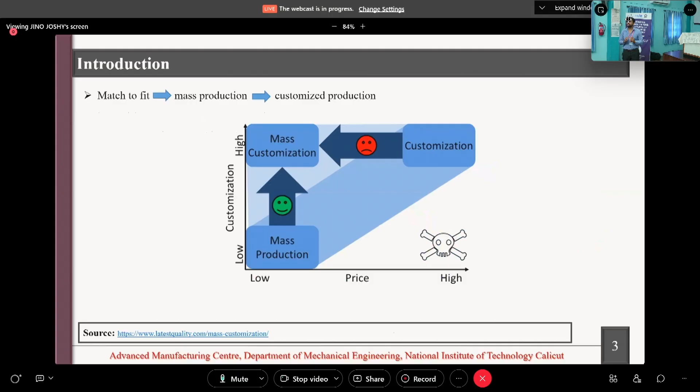Whenever customization is low, mass production cost will be less. And whenever customization is higher, that means if you reduce the number of components you are ordering, the product cost also gets increased. But our intention here is to make highly customized components with very low cost. So that means you need to get freedom for customization, that is what we are all looking forward to.

When we look at additive manufacturing, to some extent it gives us good flexibility. In addition to that, additive manufacturing gives us many advantages. After that, I will tell you what additive manufacturing is.

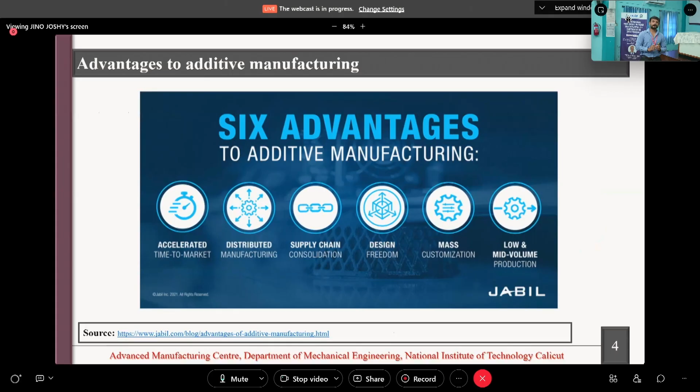Then there is design freedom. Some components are very difficult to fabricate through conventional manufacturing processes, but those designs give a lot of efficiency, for example in the working environment. But we are not able to fabricate that in conventional ways. So in such cases, design engineers need to compromise with manufacturing engineers to change their design to manufacture it, compromising efficiency or functionality.

With the help of additive manufacturing, without compromising, whatever the design engineers are designing, we will be able to develop it. That is what is called design freedom. We will be able to get design freedom, mass customization, and low and mid volume production. This process is not currently possible to apply on a mass production scale; nowadays it is developed efficiently to a level of low and mid volume production, not for high volume production.

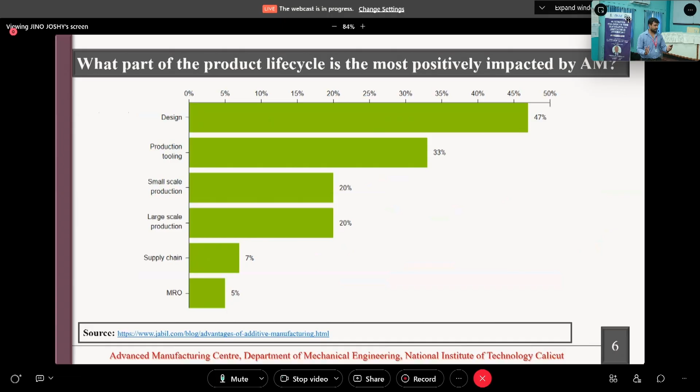If you look at the industries where additive manufacturing has positively impacted, its impact was maximum in the design industry. The way we design for conventional manufacturing has completely changed with the help of additive manufacturing. The next impact is in production and tooling industries, then small scale production, large scale production, and supply chain as well. So it is more related to design. The way we design components for different applications has changed with the adoption of additive manufacturing, that is 3D printing, as a manufacturing process.

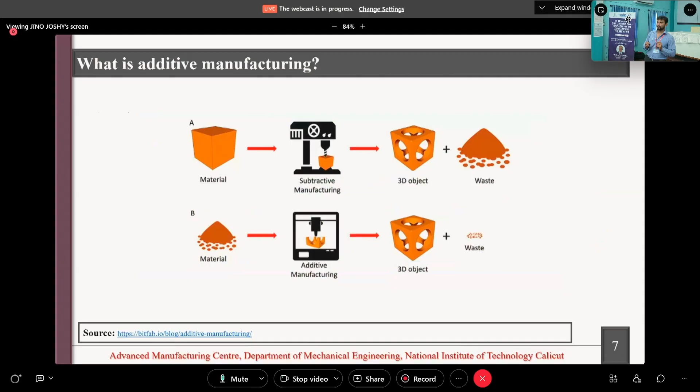But in additive manufacturing, we take the material in the form of powder, wire, or other forms, then apply additive manufacturing processes to directly make the 3D object in a layer by layer fashion. So ultimately you end up with the 3D object, and the waste will be significantly low. From the figure you can see the waste demonstrated in the schematic diagram, very little material. We cannot say there is no wastage, but to some extent there is very little. So we can say it is one of the environment friendly, sustainable manufacturing processes.

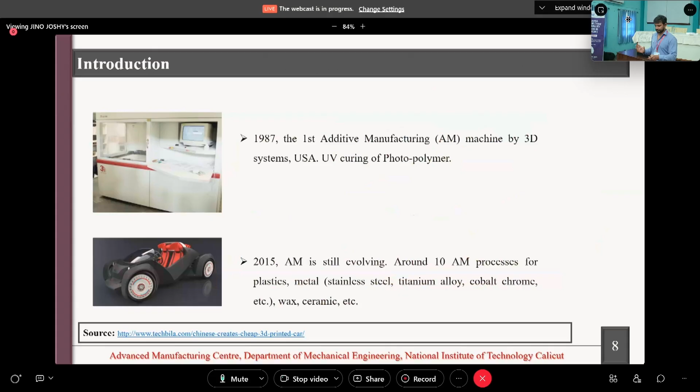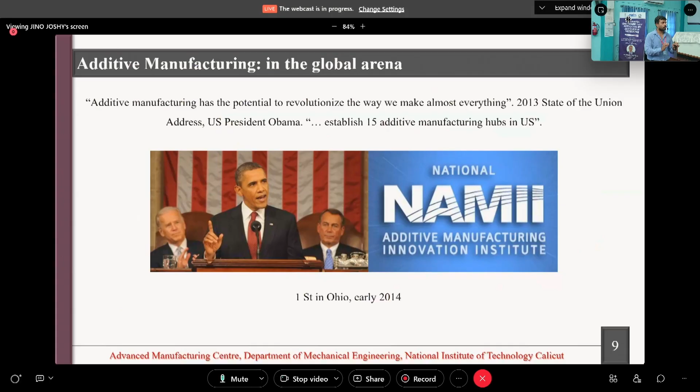Additive manufacturing got global recognition or global attention in the year 2013 when Barack Obama praised additive manufacturing in one of his United States addresses, the State of the Union address. What he mentioned is that additive manufacturing has the potential to revolutionize the way we make everything. With this statement he started his address, and he established 15 additive manufacturing hubs in the US.

Followed by that, a lot of US industries as well as the US Air Force, US Navy, National Science Foundation, and so many other funding agencies started investing, including NASA. They started investing a lot of money in additive manufacturing research. This created a requirement to develop a lot of additive manufacturing capabilities across the world, so many software companies and other well-established companies started investing money in it by understanding its potential.

So it became a rapid evolution of additive manufacturing. Research started in the world because before 2015 we were not knowing about additive manufacturing a lot. It was there, even in NIT Calicut we were having rapid prototyping machines since 2006 onwards, but there was not much research happening. But now that is not the case, we do have a lot of research happening in the area of additive manufacturing.

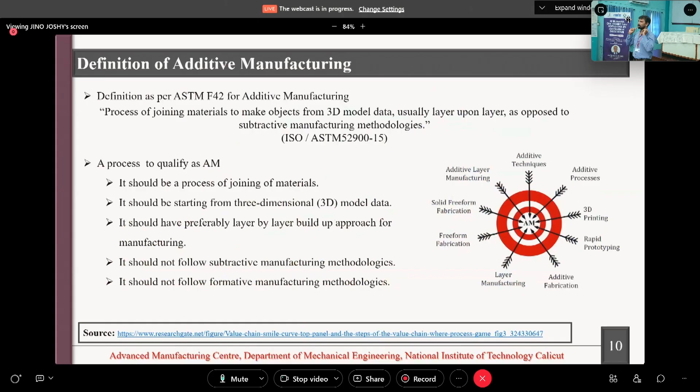So let's come back to the definition which I asked previously. According to the ASTM F42 committee, additive manufacturing is defined as the process of joining materials to make objects from a 3D model data, usually layer upon layer, as opposed to formative or subtractive manufacturing methodologies. Whenever we try to call a process additive manufacturing, it should qualify this definition, otherwise it cannot be called an additive manufacturing process.

Even though there are many processes having the methodology of layer by layer fabrication, in many cases we don't call them additive manufacturing because the process or methodology does not start from a 3D model data. It is compulsory that if you want to call a process additive manufacturing, it has to start with a computer digital model, a CAD model.

So not only this term, this similar technology was known in different parts of the world by different names, as you can see in that figure. Some places it is called layer by layer fabrication, some places 3D fabrication or 3D printing, some places rapid prototyping, some places additive layer manufacturing, some places solid freeform fabrication, some places digital manufacturing. That is one of the reasons why ASTM came up to form a single name on it - that's why they came up with this particular name, additive manufacturing.

I hope you guys understood. So according to this definition, in order to call a process qualified as additive manufacturing, it should be a process of joining material, it should start from a 3D model data, it should preferably have a layer by layer build approach, and it should not follow a subtractive or formative manufacturing methodology.

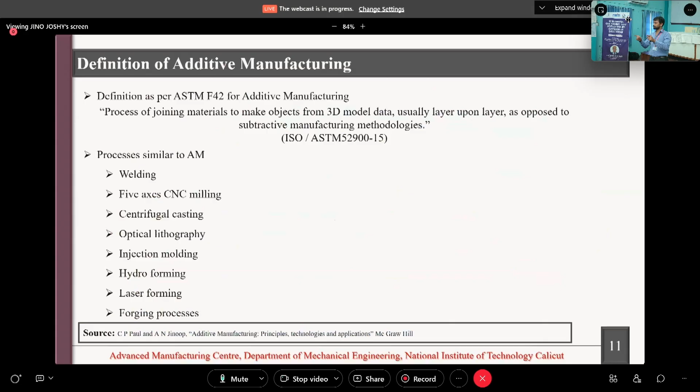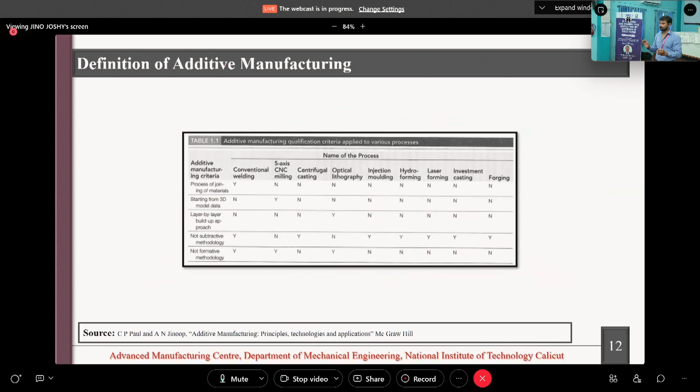Especially in areas like aerospace or biomedical industries, the number of components we are fabricating is very, very less. We are making 3 or 4 rockets in a year, right? So we require only 3 or 4 engines a year, that much component only we require. So the number of quantities we are making is less.

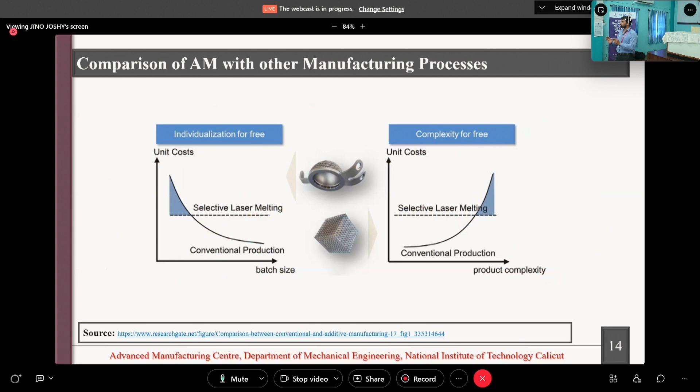But we cannot say that there are some components that still cannot be fabricated through some of the additive manufacturing processes. Anyway, we will come to that later if required.

Conventionally, making these cooling channels is very, very difficult. So previously they were not making these cooling channels at all - otherwise the shape was not like this. Because if you look at it, it has a curved profile, and they required a whole curved internal cooling channel in a curved way. Is it possible to fabricate through conventional methods? You cannot drill it - a straight hole you can drill, it's a very simple shape, but we cannot make this. But with additive manufacturing, we will be able to do that.

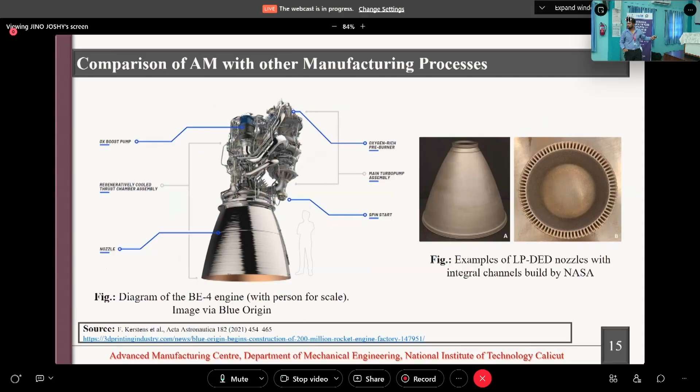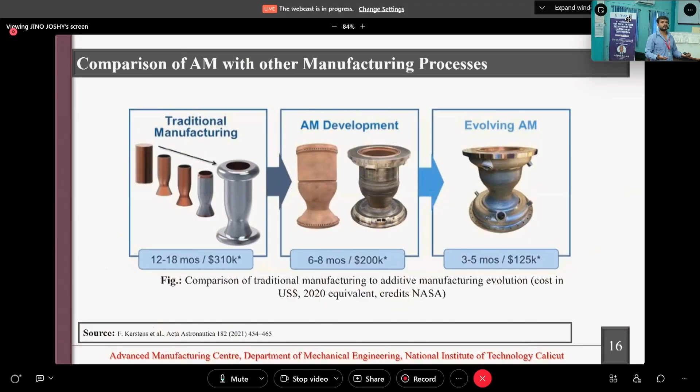And with evolving additive manufacturing, with more capabilities, the cost came down further to $1,25,000, and the lead time also came down to 5 months or even less. So this is the lead time reduction happening with more efficient design in less time.

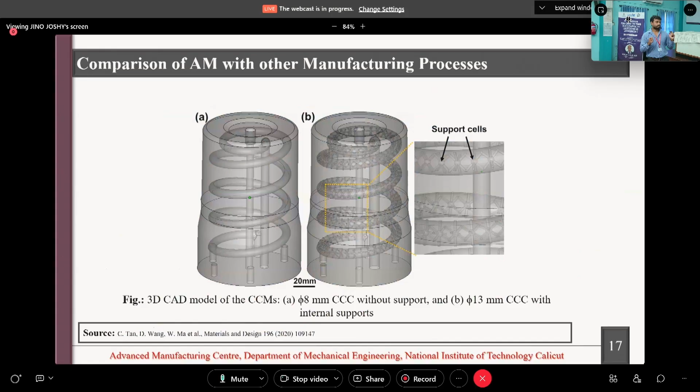This is another application of additive manufacturing, for making internal cooling channels. This is for a die-making industry, specifically an ejector pin in a die used in injection molding. This component experiences high temperature.

Every time they put out this hot component from the die, they use an ejector pin. Have you all understood about dies? Like in casting, we have a die, in the case of die casting. Similarly, in injection molding, we also have a die.

We inject the plastic or molten metal into it, and once it is solidified, it has to be ejected out. For that, there is an insert. This insert experiences heat every time it comes in contact with the hot metal.

So whenever it keeps getting heated, there will be thermal softening, which can cause plastic deformation or wear, so it can deform very fast. So what we want is to cool them, we need to cool them.

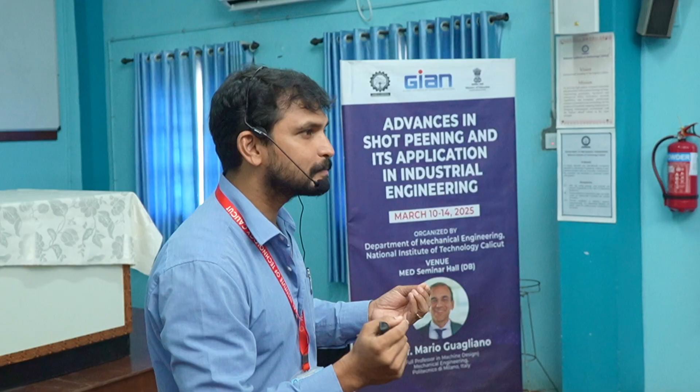So for that, what do we require? In order to cool that, what do we require? In order to cool that, we require cooling channels, internal cooling channels, without affecting its strength.

Similarly, if you design specifically for additive manufacturing only, its weight can be further reduced to 0.4 kilogram, meaning we save almost 91% of material. So weight reduction in the design or component is another advantage of additive manufacturing.

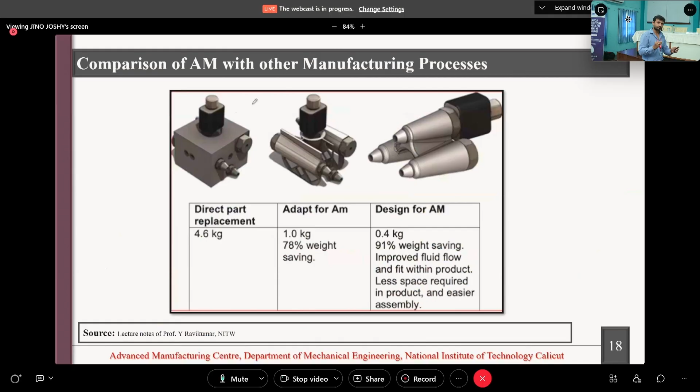Can you wake him up? Can you tell me what are all the different advantages of additive manufacturing? What are all the advantages of additive manufacturing? Any two advantages of additive manufacturing.

Less production time—not production time, less lead time. Lead time and production time, there is a difference. What is the difference between production time and lead time?

Production time is a subset of lead time. Lead time means from the time you started to conceptualize the product, design, iterations, then fabrication, and release into the market—that entire time is the lead time. Production time means only the manufacturing time for making that component. So production time is not less, only the lead time is less. Production time, in many cases, will be larger in the case of additive manufacturing.

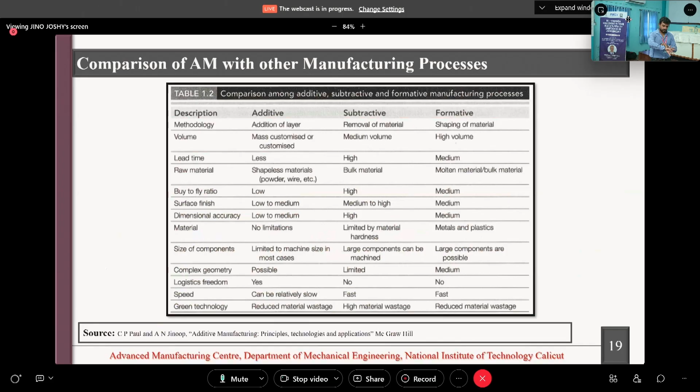Anyway, I am not going to compare additive, subtractive, and formative manufacturing processes, I am skipping that. So the major advantages we are getting are: weight reduction, part consolidation—meaning multiple parts can be integrated into a single component—individualization, and complexity is free. These are some of the advantages of the additive manufacturing process.

I'll skip all these things.

If you look at the history of additive manufacturing or 3D printing, it can be divided into three major areas. The first is its infancy period, from 1981 to 1999. In 1984, the first SLA 3D printer was discovered and patented, and based on the same technology, in 1987, the first additive manufacturing machine came into the market by 3D Systems.

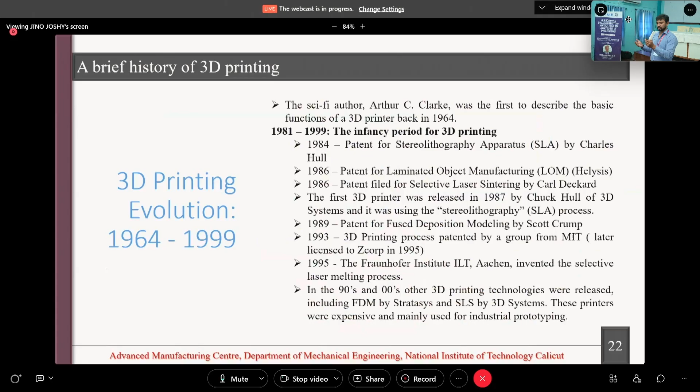From 1999 onwards till 2010, it is considered its adolescent period, with many activities happening during this time. Then from 2011 onwards till today, it is considered the prime time of additive manufacturing. A lot of breakthroughs happened, lab grown organs were produced, and many other developments occurred.

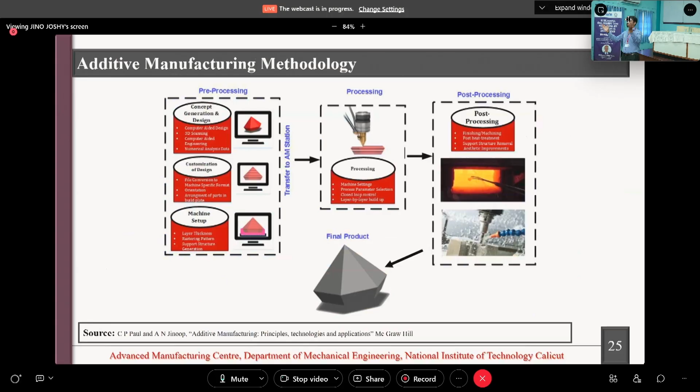Now let's forget about all this history and advantages, and come back to additive manufacturing methodology. When we talk about additive manufacturing, it has three different stages: pre-processing, processing, and post-processing. In the pre-processing stage, the conceptualization of the 3D component you want happens, and you have to design and make a 3D model in a CAD software.

Once you make this 3D model, you need to convert that 3D model into STL files. What is meant by STL files? What is the full form of STL?

The CAD files you are making are normally in step file format, which may not be suitable for additive manufacturing. It needs to be converted into STL files. STL file is called standard tessellation language.

It is not stereolithography files, though that is also a name very often used. That is based on the first additive manufacturing technology, because this STL file is used for the first additive manufacturing process, that is SLA, stereolithography. So we usually call it stereolithography files, but actually it is standard tessellation language.

We need to convert the step file or the CAD file into STL files. In that stage, we are dividing all the surfaces in your CAD model into small triangles, and then saving the information related to the three vertices of each triangle and the normal of that particular triangle. Only this information is saved.

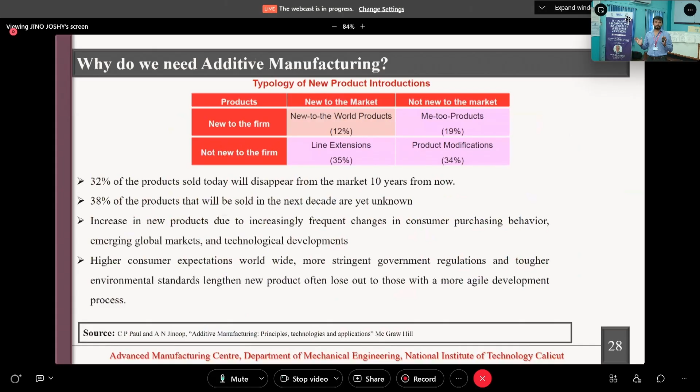So why do we need additive manufacturing? If you look at this graph, it is assumed that almost 32% of the products sold in the market now will disappear in another 5 to 10 years, and 38% of the products that will be sold in the next decade cannot even be conceptualized now. That means additive manufacturing is going to drastically change product availability. It is going to get completely changed.

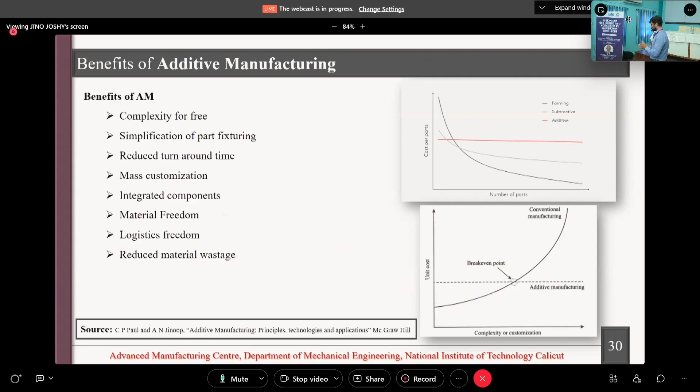And this cycles, I'm also skipping it due to time restrictions. Here you can see the benefits of additive manufacturing: complexity is free, simplification of part fixturing, reduced turnaround time, mass customization, integrated components, material freedom, logistic freedom, and reduced material wastage. These are some of the advantages of additive manufacturing.

Now some limitations: whenever you try to make a curved surface through additive manufacturing, it leaves you with the staircase effect. When you make one layer and then try to make the next layer, a step is formed. This only happens when you are trying to make curved surfaces.

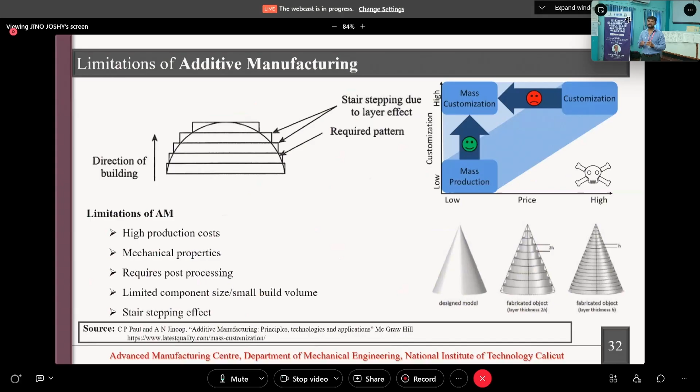Then, along with that, there are some high production costs. Mechanical properties will have directional anisotropy, it requires post-processing, and there are limited component sizes. Currently we have a limitation on the size of components, we don't have large machines, but nowadays people are starting to make bigger machines. The stair-stepping effect is also another disadvantage of additive manufacturing.

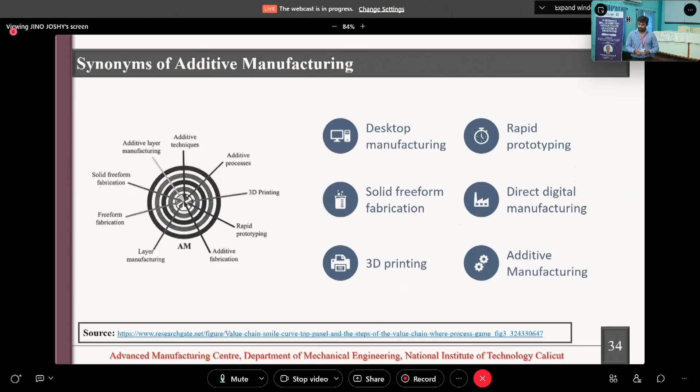So now, according to ASTM, the F42 committee, that is called 52900, we do have around 7 additive manufacturing technologies.

Let's start with the first one, that is vat photopolymerization. This is the first technology, based on SLA, that is stereolithography, based on photo curing of the material, that came into the market.

Then we have material extrusion, that is called FDM technology, fused deposition modeling. But ASTM says we should use the word FFF, fused filament fabrication. FDM is a trademark name of one particular company, Stratasys; their model name is FDM. According to ASTM, the technology is called fused filament fabrication.

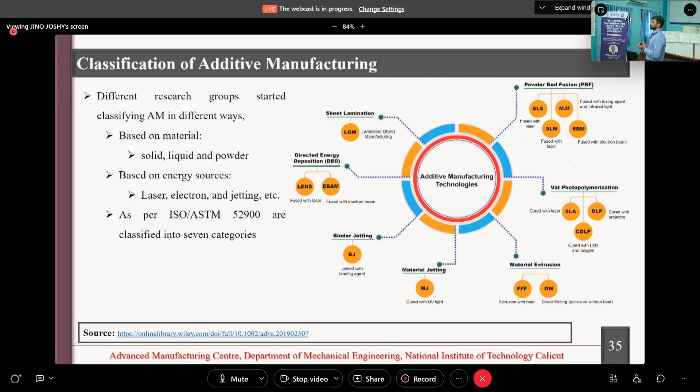Then we have another technology called material jetting, the third technology according to ASTM. Then we have binder jetting. Then directed energy deposition. Then sheet lamination. And then powder bed fusion. So these are the 7 technologies according to ASTM categorized under additive manufacturing.

So today I wanted to introduce you to powder bed fusion, the first technology in additive manufacturing process, which also has the highest level of industrial maturity. This process has obtained the highest level of industrial maturity, meaning 5 out of 5 has already been reached. That doesn't mean no research is required; research is still required at that level further.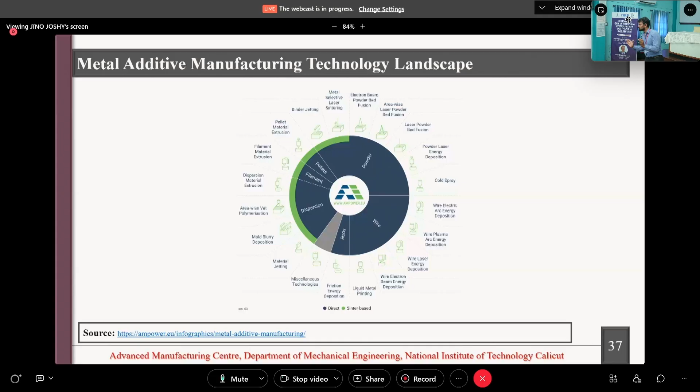In metal additive manufacturing, currently many technologies exist, but I am not going into the details of all of them. Many technologies are there, but not all of them are listed according to ASTM. They may be listed in the future. Forget about all those things, let's focus on laser powder bed fusion.

Laser powder bed fusion comes under metal additive manufacturing, and also under the melting based process. Here the material is deposited by melting the feedstock, and the feedstock is powder. That's why it is called powder bed fusion.

So based on the melting process, it can be divided into two: powder bed fusion and direct energy deposition, two different categories. Within powder bed fusion, again we have two categories: one using a laser beam, called laser beam based powder bed fusion, and another called electron beam based powder bed fusion.

So we are talking about laser beam based powder bed fusion for today, just for another half an hour, and I will introduce this particular technology, how it works. Is it okay? Any doubt till this time?

Any doubt? I am happy that no one is sleeping. Only 2 people dared to sleep, now they are also not sleeping. Any doubt? No? You understood everything about additive manufacturing.

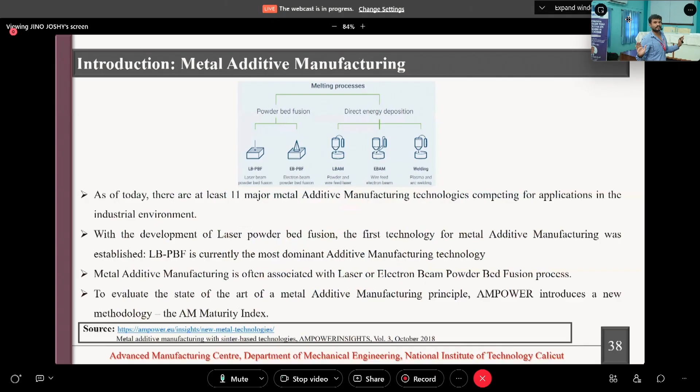Can you tell the definition of additive manufacturing now? How do you define additive manufacturing according to ASTM? The process of joining material to make a 3D object in a layer by layer fashion from a digital model, as opposed to subtractive or formative manufacturing processes.

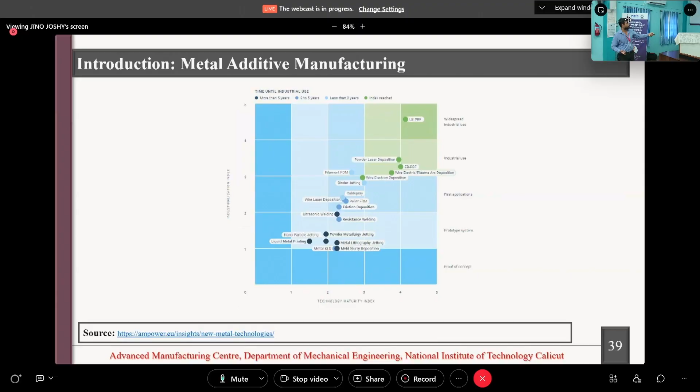When we talk about metal additive manufacturing, different heat sources can be used for it. We can use lasers, electron beam, or even the welding arc for additive manufacturing. When the arc is used, it is called wire arc additive manufacturing. Based on these heat sources, we also have additive manufacturing technologies with hybrid heat sources.

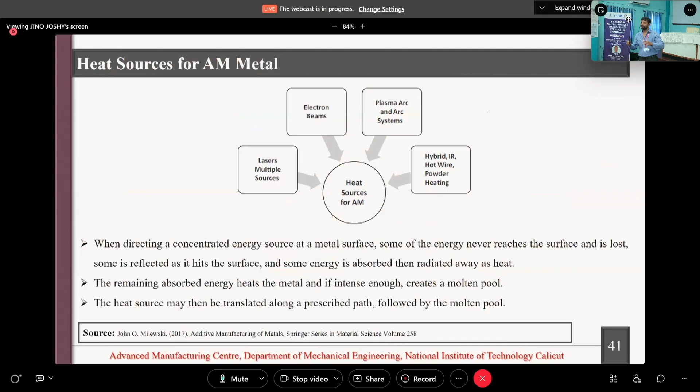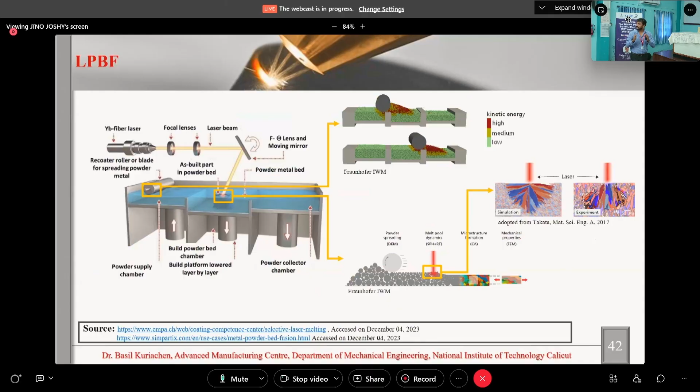I hope you guys understood how the laser powder bed fusion technology works. Whenever the laser comes in contact with the powder particles, some energy is reflected, some is absorbed, and some is transmitted. Whatever laser energy is absorbed will be utilized for increasing the temperature, and that will be responsible for melting the powder particles.

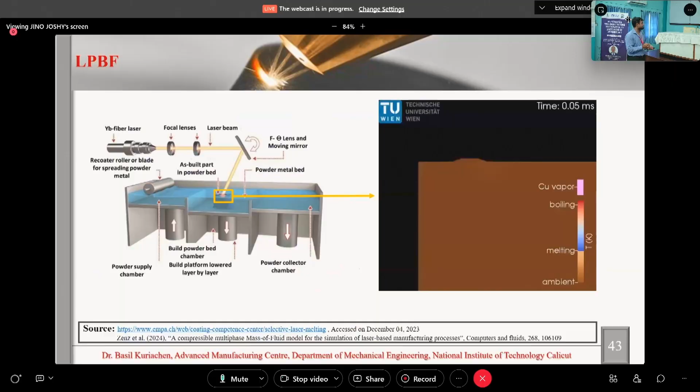This is how the laser powder bed fusion process works. Whenever a laser beam comes in contact, it melts one layer of powder, and as it melts, a lot of fumes are generated, and some of these fumes get entrapped inside that layer itself. You can see that some of the layers have fumes getting deposited over there itself.

It is a simulation. The laser beams are coming and melting the powders, and while it is getting melted, some of the low melting point alloying elements may get vaporized, and fumes are getting generated. These fumes get entrapped inside the layers, so the component we are fabricating will have residual stress, as we have seen, generated because of the thermal gradients.

It will be changing within the layer as well as across the layers. In addition, we have these small spherical or differently shaped pores that will be present. Is there any problem because of this?

What kind of problem? It will be voids. How will it be influencing our properties? It will change the mechanical properties.

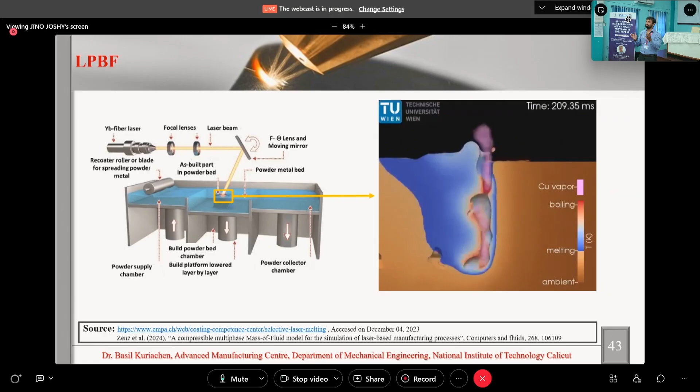How? It significantly influences the strength, not exactly. Small pores will influence the fatigue properties if they are on the surface or at subsurface levels. That's why in additive manufacturing a lot of fatigue tests are conducted, because these different shapes are forming and located on the surface as well as subsurface levels, and it will not give consistent fatigue material behavior.

It may be different at different times because different kinds of pores will be forming, influencing stress concentrations and crack propagation differently each time. This leads to inferior fatigue properties, and not only fatigue properties but mechanical properties overall, so we will be getting different properties.

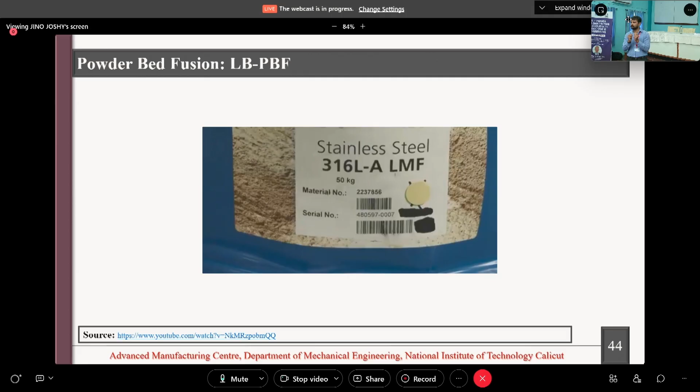Here is a video to help you better understand how laser powder bed fusion works. Very small, fine powders are used for making laser powder bed fusion components. Whenever the laser comes and interacts with the powders, we will be able to get the components.

There is audio, but it is not possible to project the audio here.

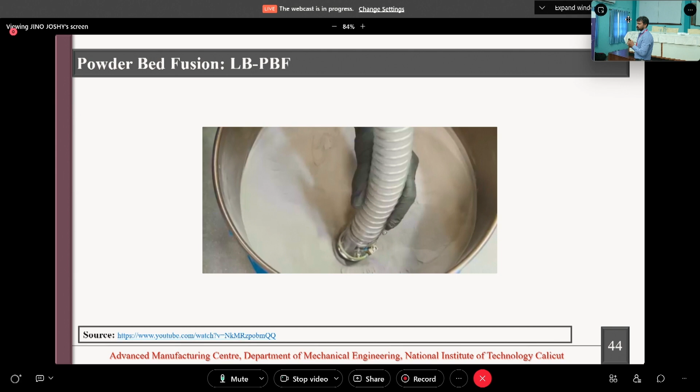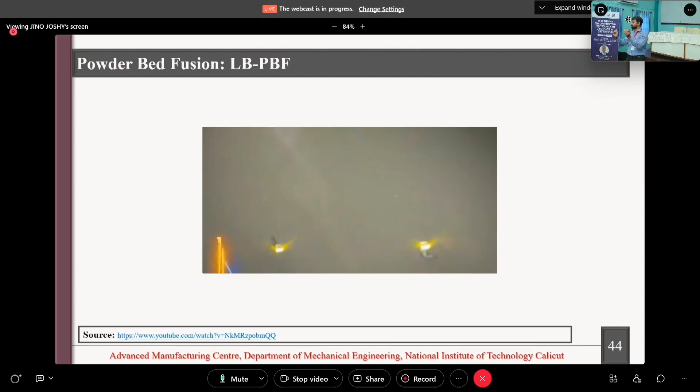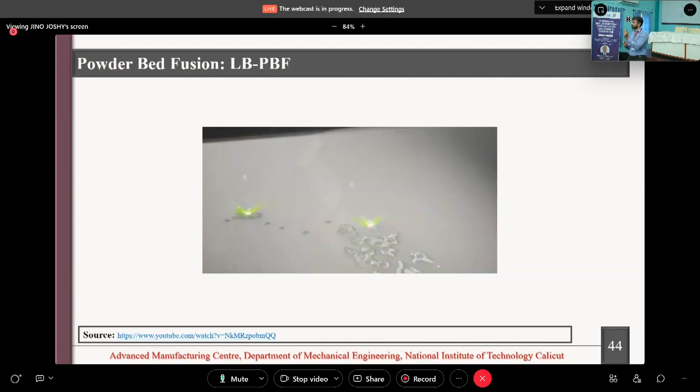This is the way they are loading the powder into the machine. Here you can see the laser interacting with the powder bed particles, where it is solidifying and making solids. Once one layer is done, the next layer comes on top of it and the laser scans again. Once it is done, we have to clean it and take the component out.

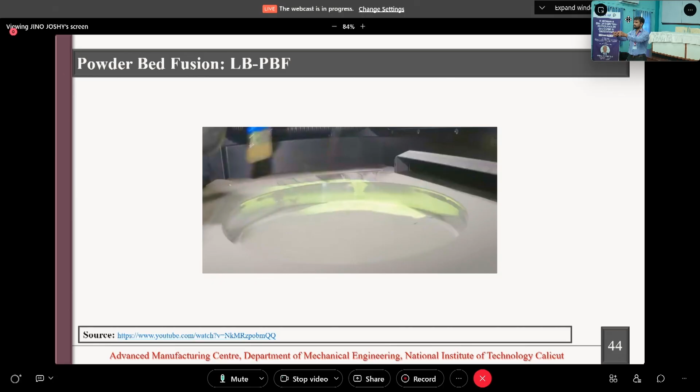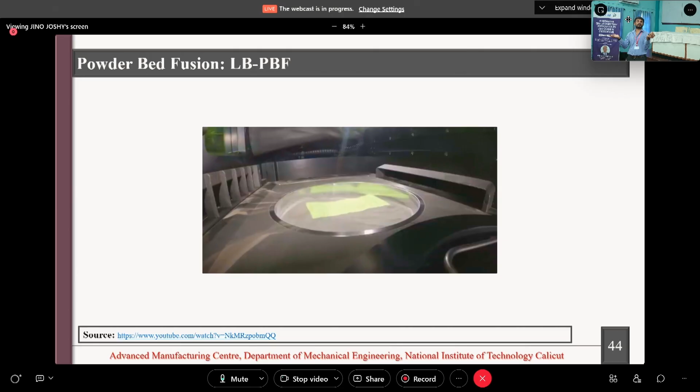You can see here that the made component is submerged inside the powder. You have to take out the entire chamber and clean it so you can take the component out. That is how this process works.

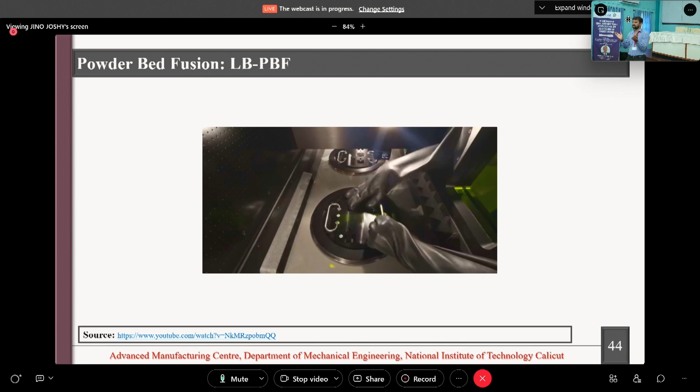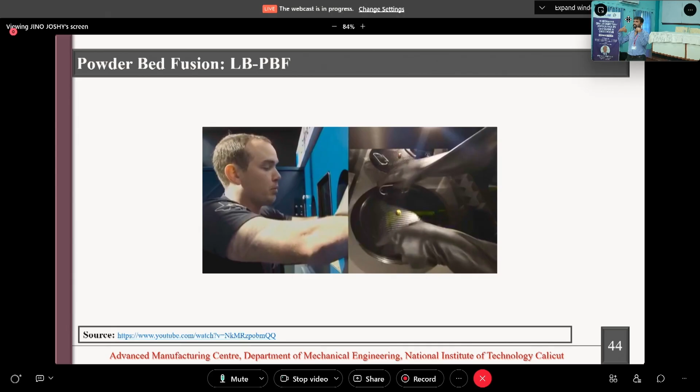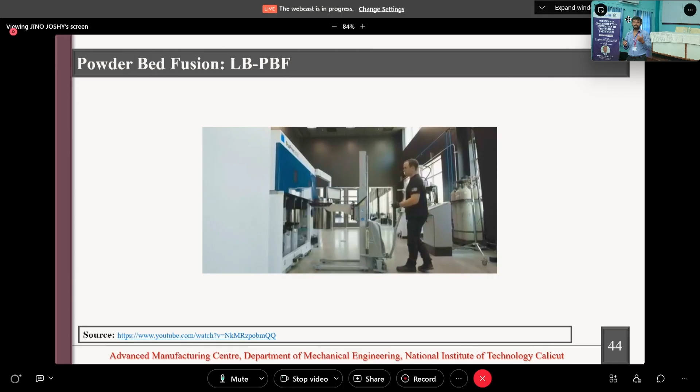They are closing the chamber and taking the entire chamber out, a different methodology. In this, they close it and take the chamber out, then use a vacuum cleaner to take all the powder out, so that finally you get the component inside, the 3D part inside.

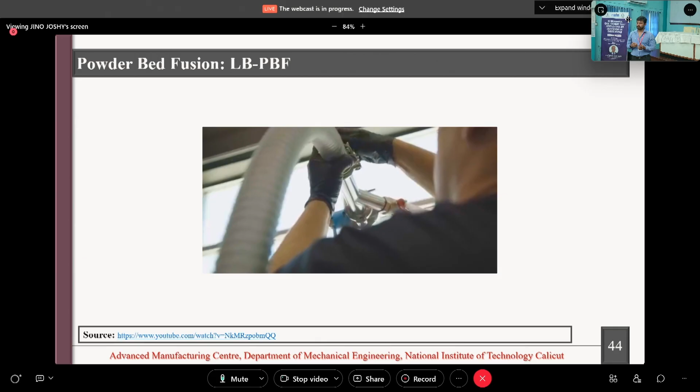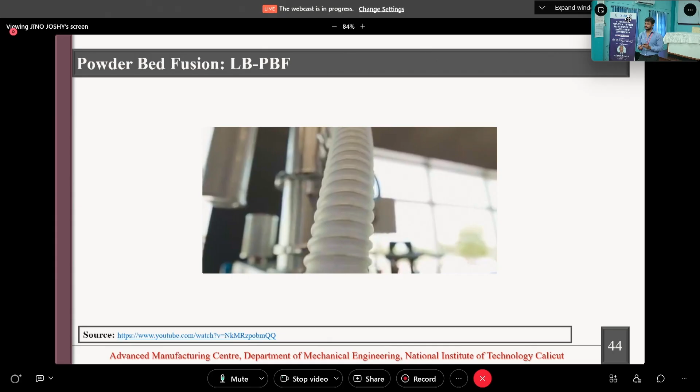Now they have started to take the powders out, sucking the powder using a vacuum cleaner. Once it is done, you will get the component.

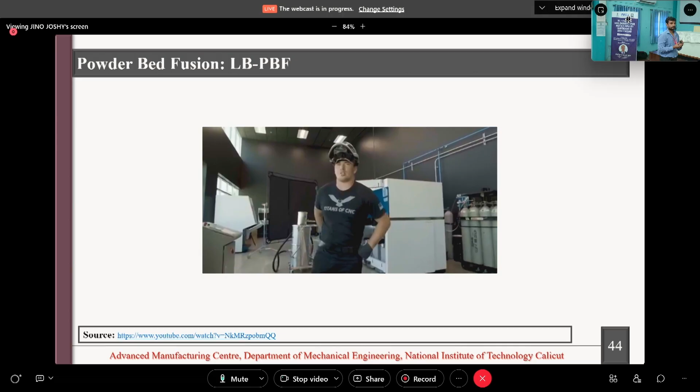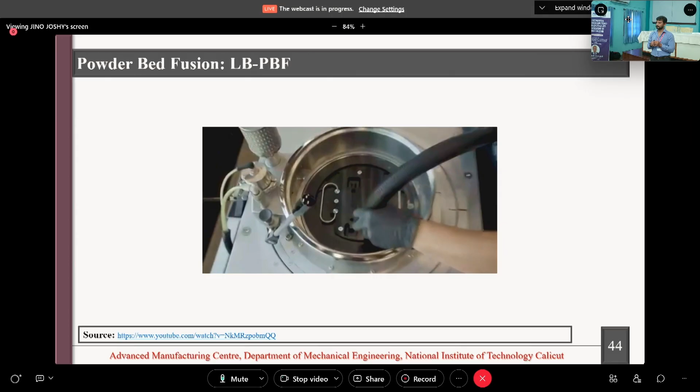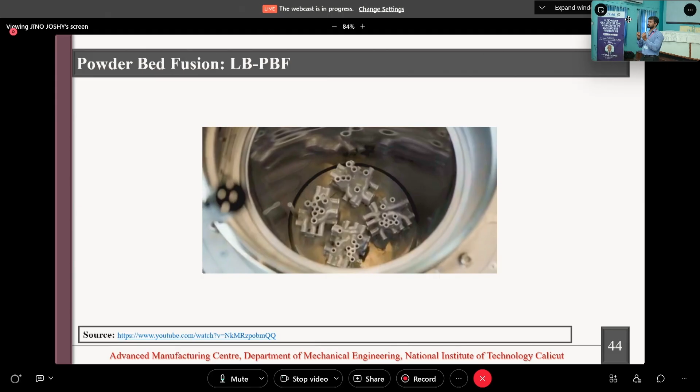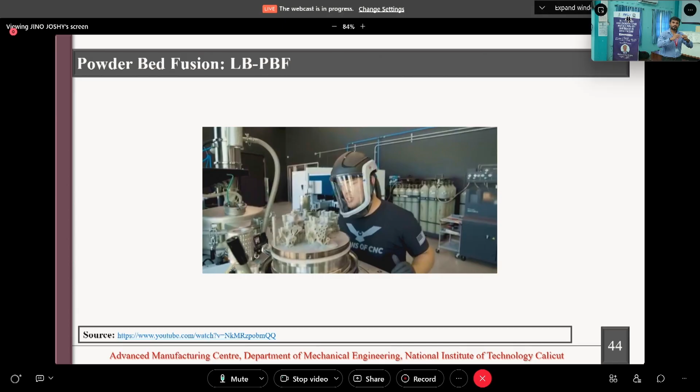You can see the design that was submerged in the powder initially. Now you can take it out and wire cut it, then do the finishing. You can see that the surface finish is not so fine; it looks like a cast finish.

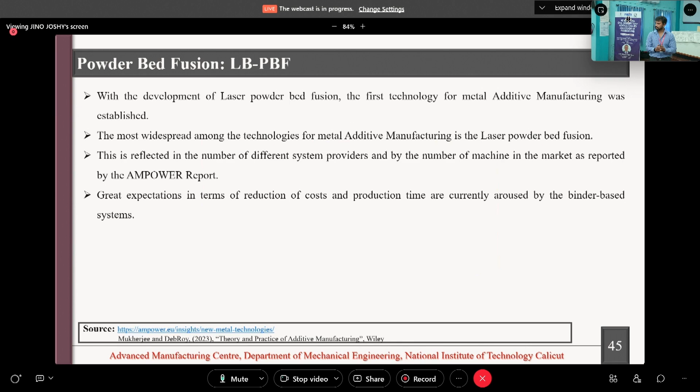So we will be talking about laser powder bed fusion. Full melting is the mechanism most commonly associated with laser beam based powder bed processing, in the case of almost all kinds of metals and alloys, and also for some polymers, in which case it is called the SLS process.

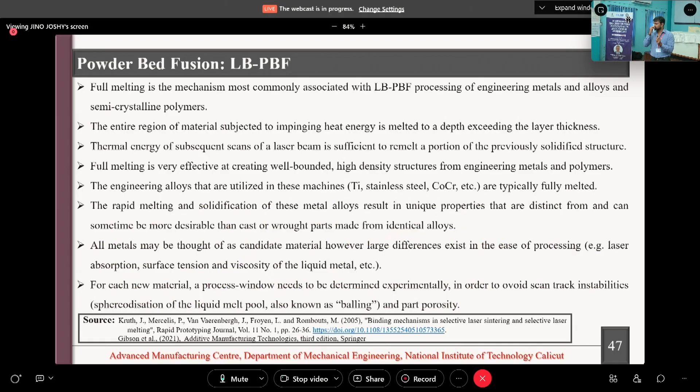The entire region of the material is subjected to impinging heat energy, and wherever the laser comes in contact, it melts to a depth exceeding one layer, because it has to join with the previously deposited layers. Normally, 30% of the melting of the previous layer happens, and the thermal energy of subsequent laser scans is sufficient to remelt that 30% portion of the previously solidified structure.

This full melting process is very effective for creating well-bonded, high-density structures from almost all kinds of metals as well as polymers. Rapid melting and solidification of these metal alloys results in unique properties, as we discussed previously.

These properties can be distinct from conventional ones, and sometimes desirable, sometimes inferior, sometimes superior. We've seen that wear properties tend to be better, but other properties may be inferior - for example, fatigue properties are normally inferior. Almost all metals may be considered candidates, but there is a large difference in how they are processed.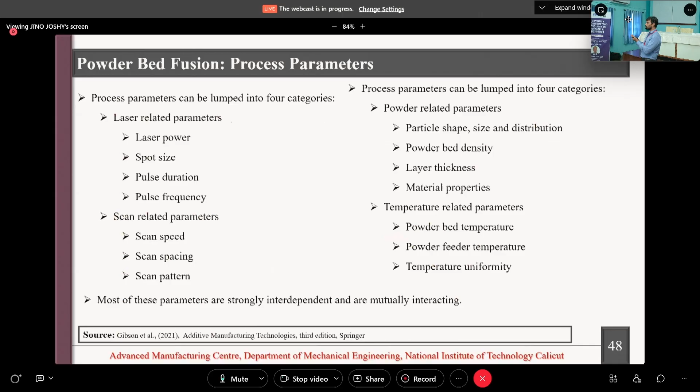Whenever you take a powder, not all the particles will have the same size. No manufacturer will give you powder exactly at 40 or 80 micrometers - they will say it varies from 40 to 100 micrometers. How that is distributed throughout the total powder is really important - that is particle shape, size, and distribution.

Powder bed density, layer thickness and material properties of the powders are all important. Then we have temperature-related parameters, that is the powder bed temperature. When the laser beam hits the powder particles, what is the initial temperature maintained on the powder bed? That is important, as it helps reduce the temperature gradient, so the residual stresses formed will be lesser. Then powder feeder temperature and temperature uniformity are also very important. These are some of the process parameters.

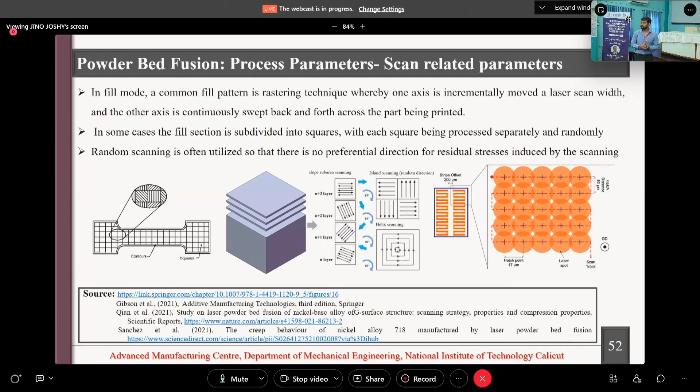Random scanning is often utilized so that there is no preferential direction for the residual stresses induced due to the scanning. This is what I have previously told, that we will always be doing random scanning. That means we don't want the residual stresses to be induced by the scanning in any one direction.

The use of a random square based strategy is primary for metal parts, and a simple raster pattern for the entire part is typically used for polymers and other low melting temperature processing.

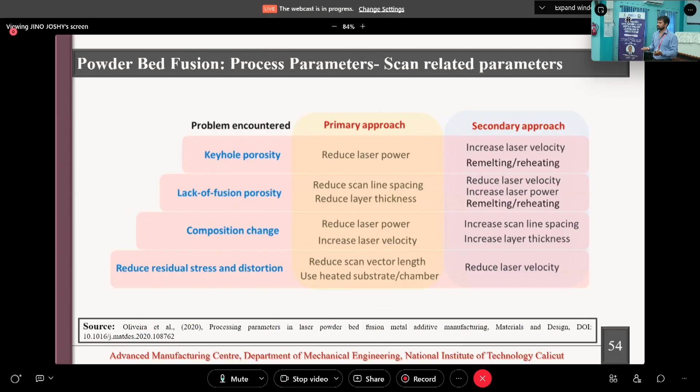Similarly, we do have powder related parameters, and temperature related parameters as I've seen previously. Whatever I have listed previously, I am just giving the explanations. I'll give you a printout so that you can read through it.

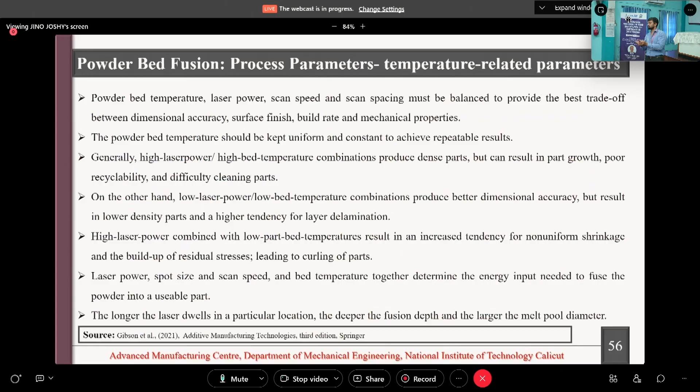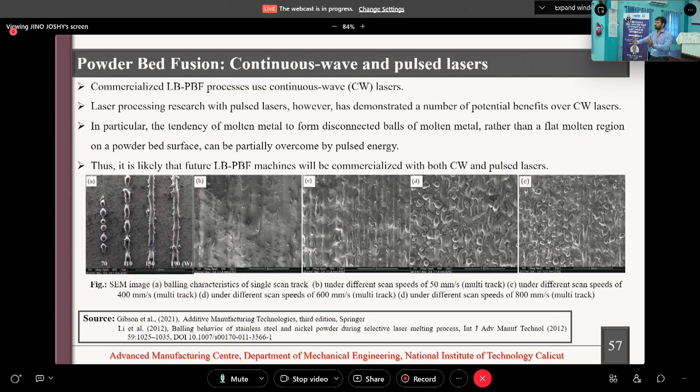This is how we get the laser tracks whenever we use a continuous wave as well as pulsed lasers. Textbooks and literature say that pulsed lasers are more powerful and give better results, but only very few companies, just one company, have started producing machines with pulsed lasers. In almost all other cases, it is continuous wave lasers only.

And the influence of the balling phenomenon. Here you can see what is meant by the balling phenomenon. In the normal case, the powder will be spread, but when balling phenomenon happens, as the layer gets melted you may get bigger balls - the powder particles fuse together and form ball-like structures on your build platform.

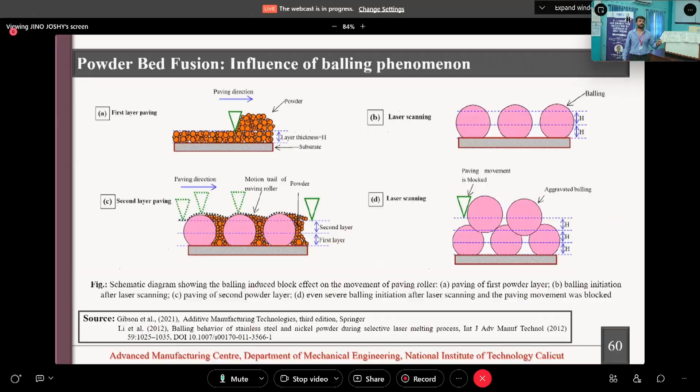When you try to spread the next layer, the recoater blade will go up and down. In this case also there is no problem, it just goes up and down. But if it ends up in bad conditions, the process will stop in between - the laser recoater blade will be stopped by the balls, and the process will be stopped over there.

So this is the balling phenomenon and the energy correlations, and finally the residual stress distributions. As I have already explained, in order to reduce the residual stress impact or randomly distribute the residual stresses, we use different scan strategies. The residual stresses and the subsequent part deflection increase with increases in track length.

So in order to avoid that, we use a very small track length, that means in infill mode, and we also change it in different layers.

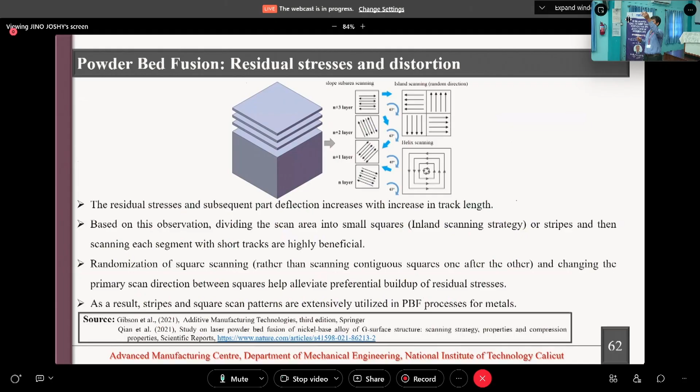And with this, I would like to wind up. In order to avoid residual stresses or these kinds of defects, there are two major reasons: one is the fatigue strength, which is comparatively lesser for additively manufactured components, and also it is inconsistent. So in order to improve that, we use shot peening - also to change the tensile residual stresses formed on the surfaces to compressive residual stresses, and also to improve the surface properties or surface roughness. So we require shot peening.

Tomorrow he will be majorly talking about metal components and the impact of shot peening on additively manufactured components. Additively manufactured components means not only laser powder bed fusion - we also have DED, binder jetting, and many other metal additive manufacturing technologies. But he will be mostly focused on laser powder bed fusion, which is why I introduced you to it.